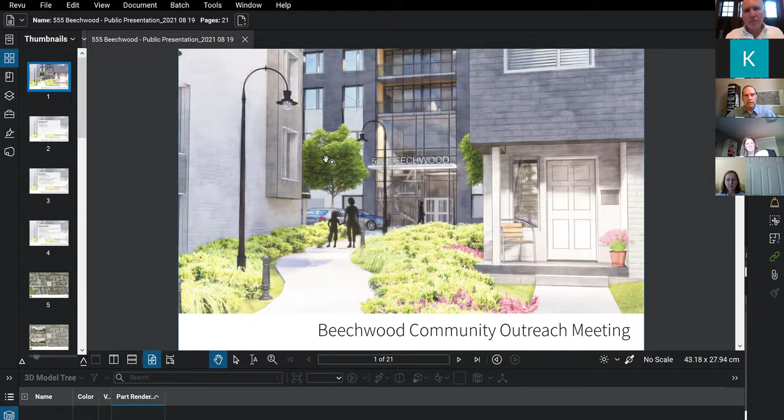This meeting's purpose, after the introductions, is to present the developer's preliminary design proposal for the development at 555 Beechwood, and to explain some of the reasoning behind the architect's designs for these lands. After the presentation, we will provide an opportunity for anyone joining us to comment on the designs or ask questions about what has been presented.

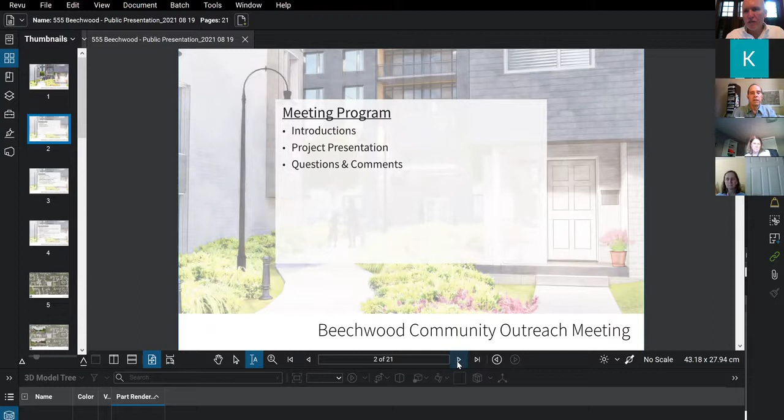Before we begin, I'd like to acknowledge that the Beechwood community, including the subject lands, are lands traditionally used by the Haudenosaunee, the Anishinaabe, and neutral people. We acknowledge the continuing presence, tradition, and philosophies of the indigenous peoples with whom we share these lands today.

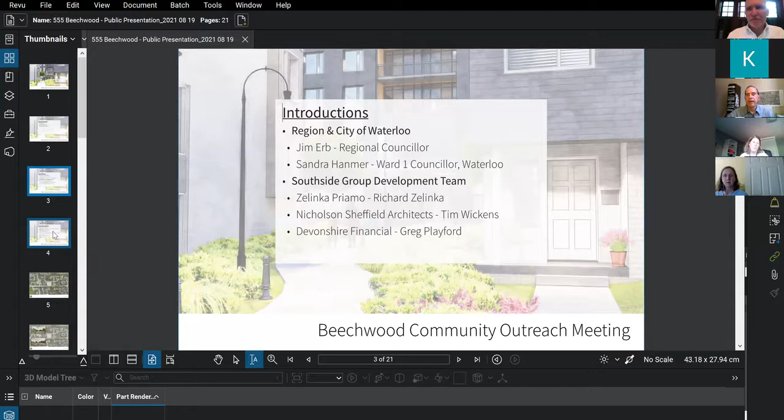I'd like to start by going over some basic project information for the design you're about to see at 555. That's going to be the name of the development for this area. I think it's important to recognize that this is primarily a market-driven housing development.

It is something that is going to be 60% geared to normal market rents in the community. So from that standpoint, it's a normal type of development that we would be reviewing with the city as part of a site plan approval. However, in this particular case, because of the region's involvement in providing the land for the project, there's an opportunity through this pilot program to provide 40% of the units within this development at a moderate rate. We refer to those as affordable units. They will be provided at 80% of the CMHC's median market rate, as that rate exists at the time of completion of the project.

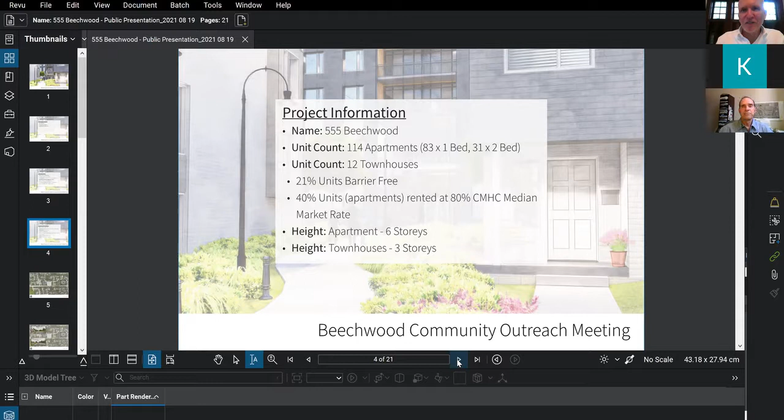So Tim, I'm going to turn it over to you right now, and we'll go through that presentation. Thank you, Richard. Again, my name is Tim Wickens, and I'm an architect with Nicholson Sheffield. We were excited to be invited to participate in this project with the Southside team. We're just going to walk through a brief presentation of the preliminary design proposal, starting with a quick review of the context, and then we look forward to receiving more comments and questions from people who are interested.

Some of you may be quite familiar with the context, but for those who aren't, it's important to note that aside from the sloping topography, which slopes down from Erb Street to Beechwood Drive, the site is significantly characterized by the fact that it fronts on two streets.

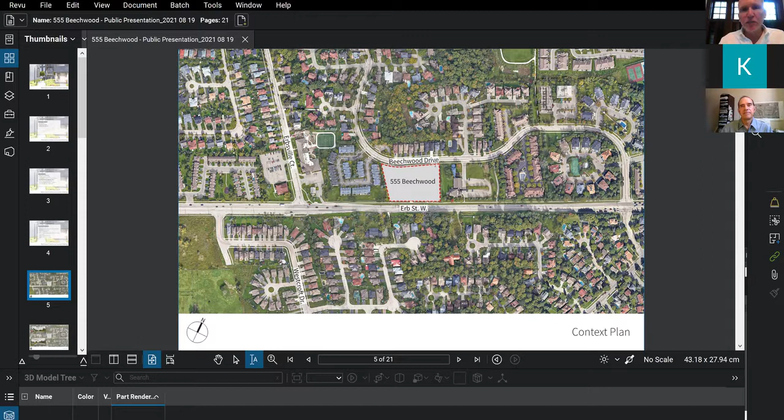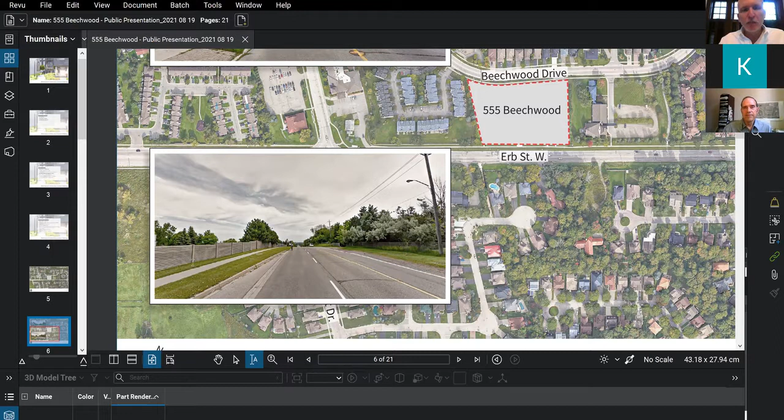If we look at the character of those two streets, they're quite different. Erb Street is a regional road with a higher speed limit, higher traffic volumes, and higher traffic noise, but it doesn't have many buildings that address the street directly, with most properties either side lotting or rear lotting onto it. The street is generally framed by sound barriers, fences, and privacy planting.

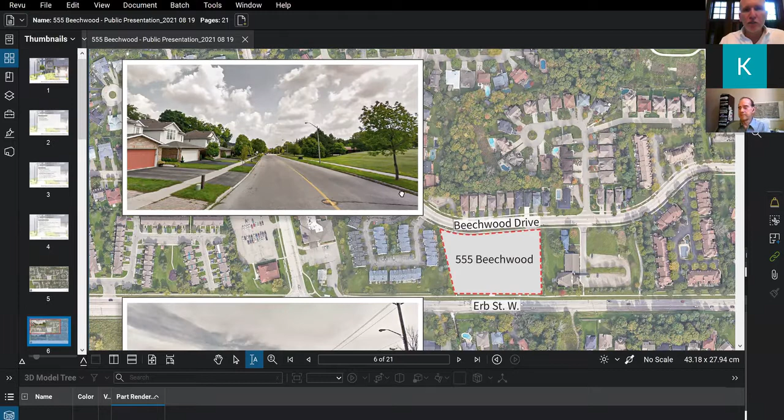Then if we look at Beechwood, especially right at the site but even in the plan, you can see this is a more traditional form of urbanism that is more pedestrian friendly, with a lower speed limit and lower traffic volumes, with not a lot of through traffic like on Erb Street. It's also predominantly characterized by buildings that address themselves directly to the street, of a certain residential scale and rhythm. That's important to how we design to respond to that.

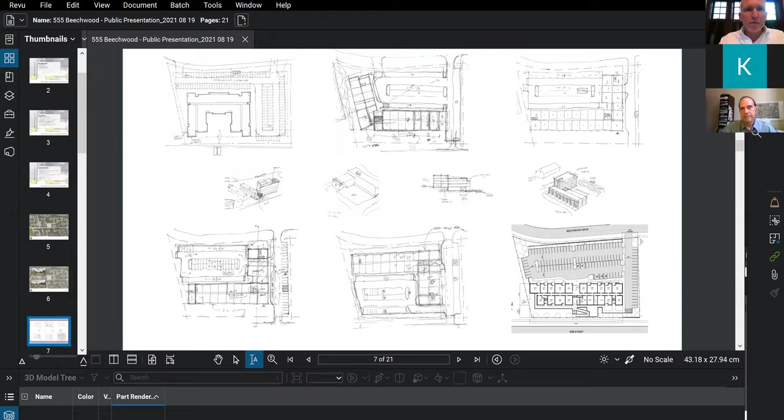The consistent thing all of these attempt to do is locate the massing in a way that contributes to that positive urban environment, predominantly locating a larger building on Erb Street that, as you can see in this rendering, transitions down to a smaller building on Beechwood.

As we worked our way through these things, we had to test them to a greater degree of specificity in the computer, inputting this information in hard lines. Initially we found that we could achieve the desirable outcome in terms of providing affordable housing and residential suites in a single building on Erb Street. We figured out a location for the driveway that made sense from a traffic safety perspective, located midway between the two bends in Beechwood Drive.

But what we found, especially after consulting with the region and city and reviewing in more detail the urban design guidelines for Waterloo and the Beechwood community design guidelines, and also reviewing with the region the comments they received from the community, is that we were going to have issues with the exposure of the parking to the friendly established residential community currently found along Beechwood Drive.

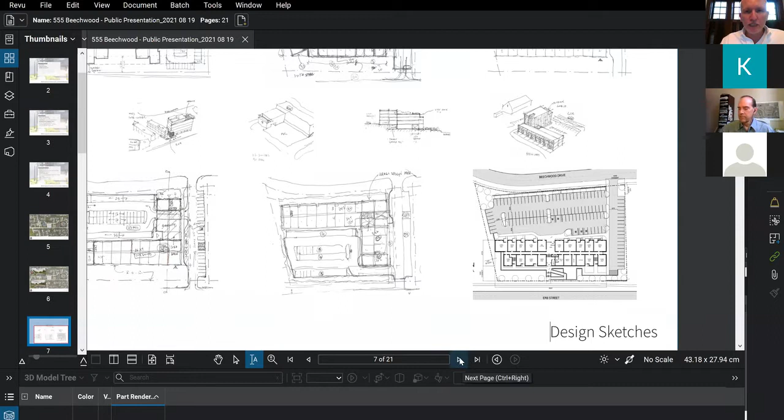So we decided to revisit the scheme. If we go to the next slide, you see what's been done: the mass of the building on Erb Street was reduced, and the parking that was initially surface parking was tucked under the building in a subgrade parking structure. So essentially about a third of the parking initially proposed for the surface is now under the building.

That gave us room to create these townhouse buildings, providing another form of housing of a different scale and type, and a transition from the Beechwood community of single-family homes and low-rise multi-unit residential development up to Erb Street and the larger building we've located there.

We've also located, as an amenity for the development and the community, a mid-block connection for pedestrians that would lead to Erb Street, quite close to the bus stop at Erbsville Court, complementing the existing through-block connection on the Cedars property.

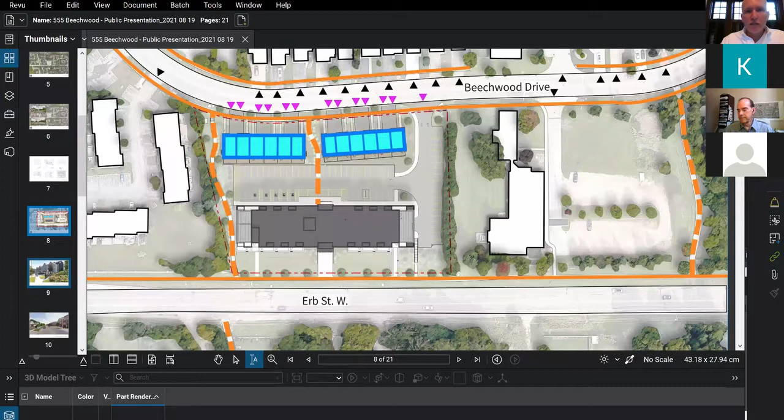And here we have a view of the west end of the development at that mid-block pedestrian connection. This is a preliminary design proposal, so the details haven't all been worked out, and part of that is why we're here tonight.

It's to get some feedback on some of these details and ideas that we're presenting. But the intent expressed here is that we would be providing a landscaped and formalized walkway, so that the site would be traversable, and the two streets would be connected year round, and that it would include site lighting, so that it would be safe day or night for anybody who might be taking transit and coming back into the community in the evening.

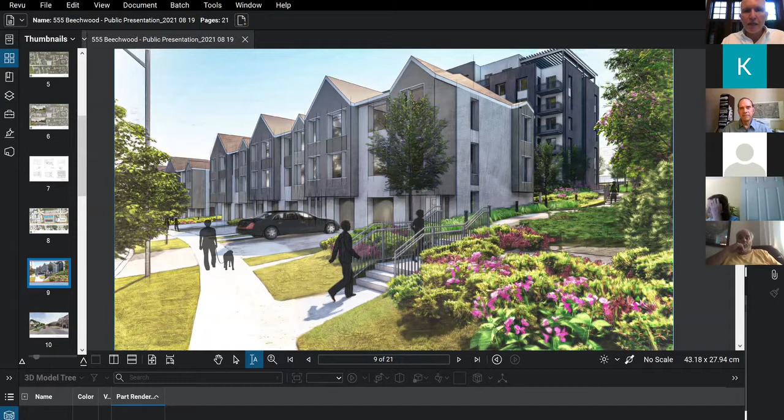This image also describes to some degree the role of the townhouses in mediating the lower rise community on Beechwood with the building that's proposed for Erb Street.

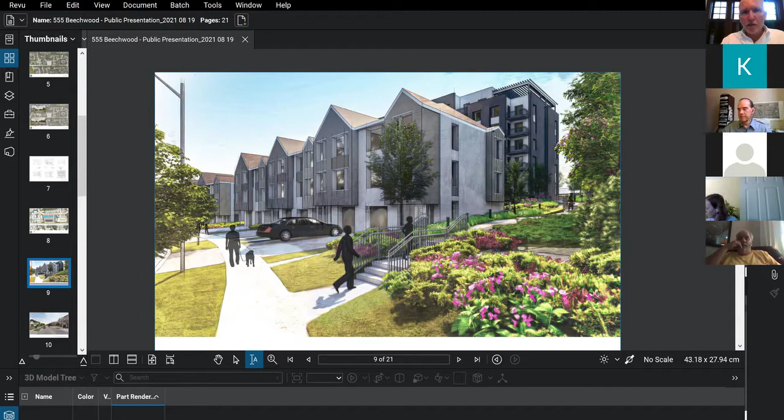So a view directly down Beechwood to the east, with the existing homes on the left side of the screen, and the proposed townhomes on the right side. Again, as a preliminary design proposal, we are working out some of the details, but the idea is to take inspiration from the architectural forms of the existing homes, and the scale and rhythm of those homes as they present themselves down the street, to create a very specific experience for a pedestrian, and utilize those to create these townhomes.

Some of the features that I think are important to these are the idea of the recessed porches that manage that transition from the public space of the street to the private space of the homes, the gable roof forms of varying scales or sizes, and the use of high quality building materials that would be found in any established residential community.

Certainly in this one, like the brick masonry that's proposed for the base of the buildings, with contrasting brick masonry for some of the details, and in this case, we're proposing a wood patterned siding for accent materials.

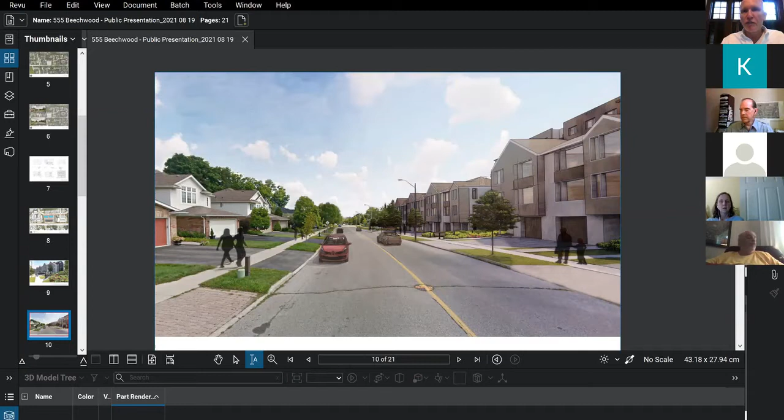And again, you see that the townhouses are providing that screening for the surface parking that exists between the townhouses and the building on Herb.

And then this is a view looking the other way towards the west from the driveway entrance to the site. It is notable that the distance provided between the driveway and the bend in Beechwood at the west end, where it bends to the north, provides a long sight line, and it's intended to provide as safe a traffic condition as possible.

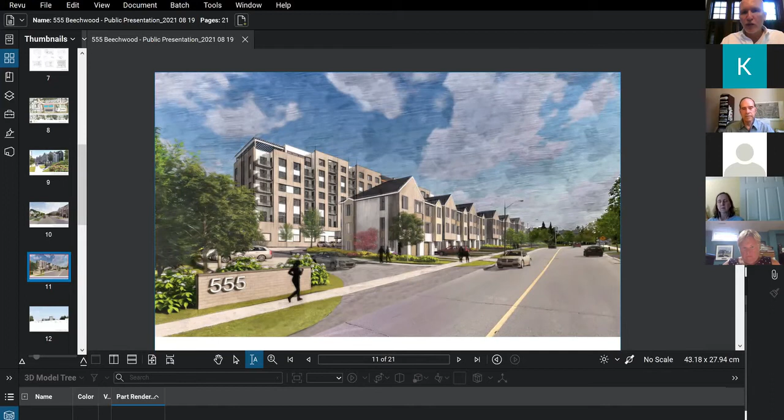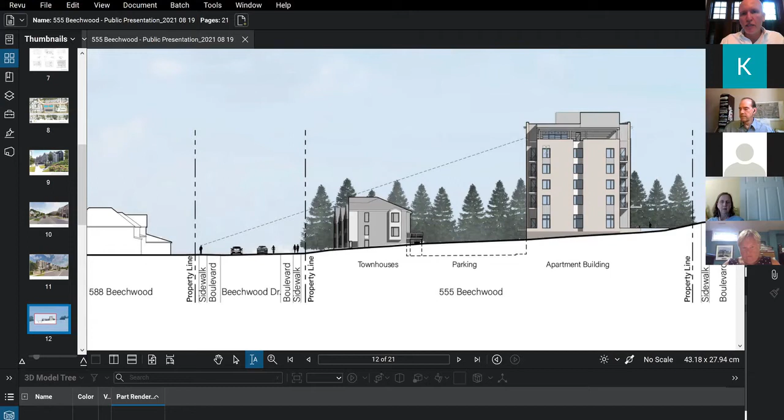And also it creates a visual transition from Beechwood, where the building on Erb, the apartment building, is seen as a background and in the same view line as the townhomes themselves.

And then the building on Erb is designed to be in scale with the street itself and to frame that street and address itself to the street.

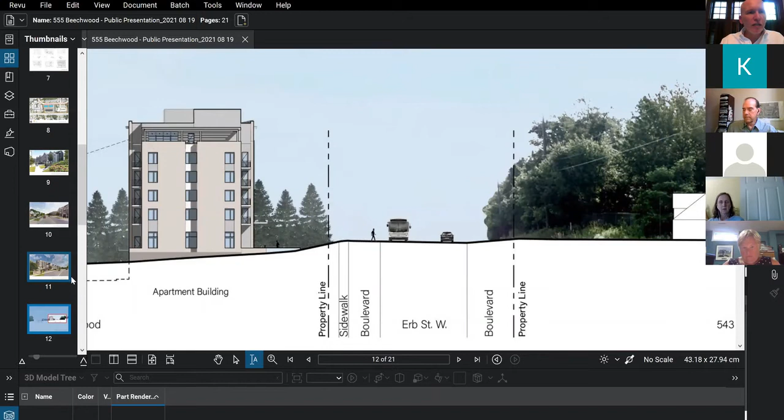If we go to the site plan, again, the intent there was that this building was reduced in scale from the original proposal after we reviewed comments from the community and from the region and the city urban design department and planning department to make room for those townhouses

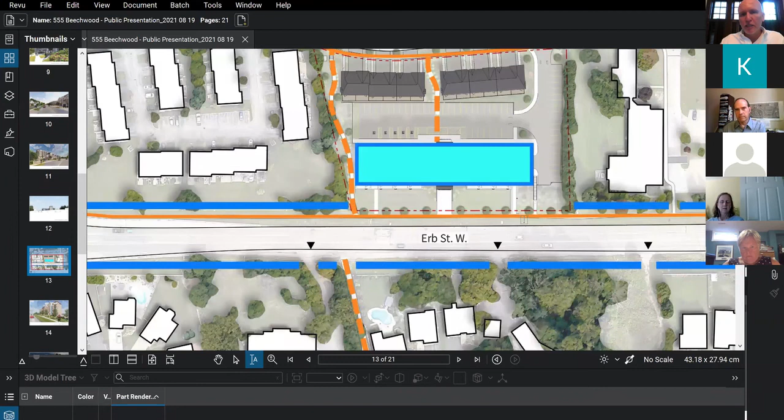and create an address on Erb Street, where typically at this time the existing buildings on Erb are facing the opposite direction or are side lotted or back lotted, creating a kind of a closed corridor for Erb Street. And the intent is that the proposed building would address Erb

and provide some of the overlook and sense of inhabitation on the street that's important for a safe pedestrian environment and certainly a safe route to get to public transit at the west end of the site. So this is a view from Erb looking at the building, the apartment building, and we're looking towards the northwest, mostly west.

Still working through some of the details on the building, but we've landed on a strategy where the building is broken up with vertical reveals to break down the massing of the building and provide visual interest at the ends of the building at the east and west.

As Richard mentioned at the beginning of the presentation, the building steps down and steps back at the 5th floor to create another vertical transition for the building to the adjacent properties. It also provides a large outdoor amenity space at the top of the building facing east.

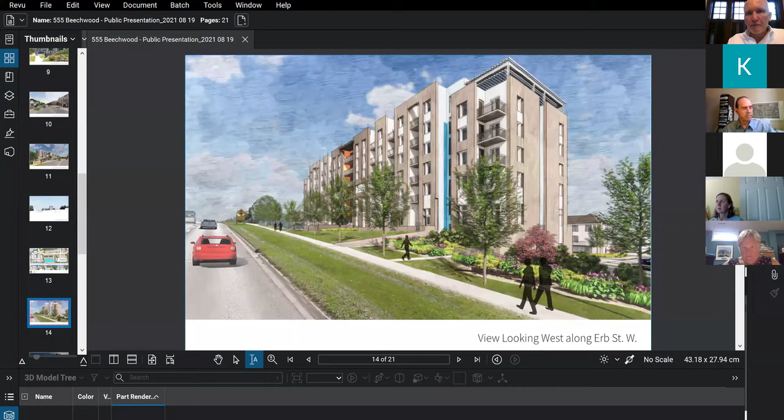This view also describes, at the smaller scale, that at grade there would be walkouts from individual units. And at the larger scale, the building creates that address on Erb Street, so it has a direct connection to the public sidewalk, through the use of landscaping and garden walls.

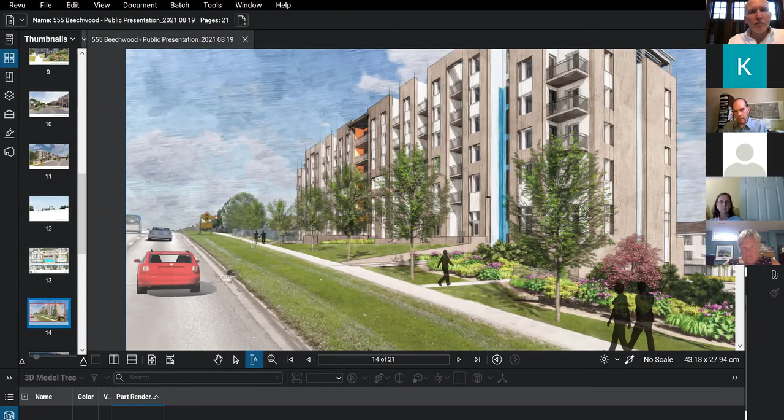Canopies, and this large vertical reveal in the building facade, and then an urban scale canopy, creates a clear address on Erb Street and a relationship to that public realm.

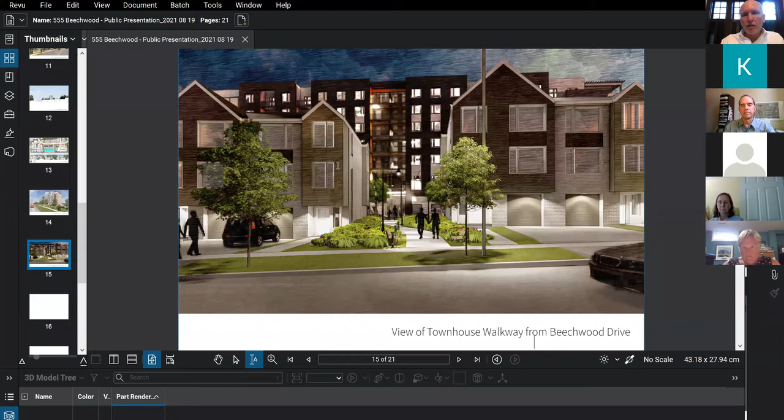And then finally, this is an image from Beechwood looking towards the building on Erb. And I mentioned this earlier, the separation in the two sets of six townhouses is a landscaped pathway that's meant to certainly break up the mass of the townhouses into something more akin to the scale of buildings that already exist in the community.

But it's also meant to create an appropriately scaled address for the building and a way for that building to relate itself to, and for the residents to participate in, the community and the culture of Beechwood.

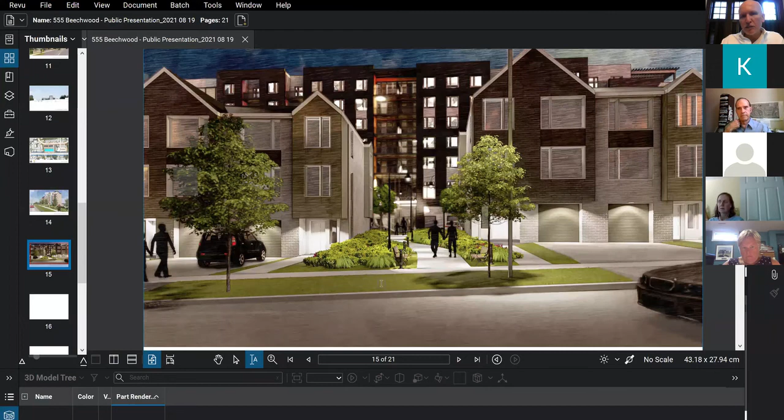And as the through block connection was described, it's meant to be lit and a safe place for people to navigate back and forth between the community and that building.

And with that, I'll send it back to Richard to, I guess, open things up for comments and questions. Thank you.

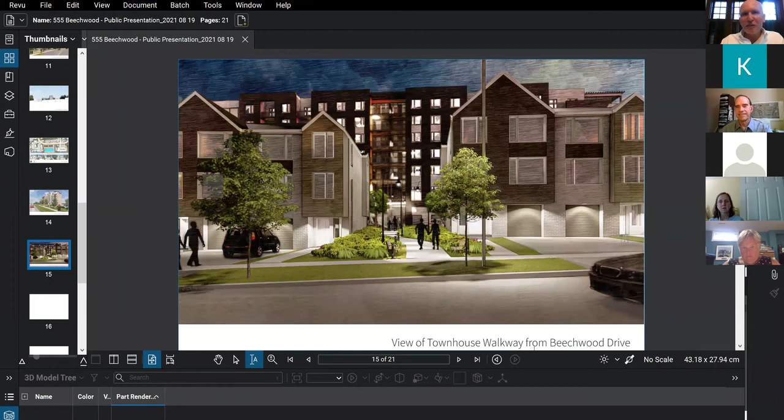Thank you, Tim. So the developer's design team has attempted to meet both the need to fulfill the housing objectives of the region and the city, and has to address some of the comments and issues already raised from community members, also from the city and the region.

You've seen from Tim's presentation the inclusion of townhousing to provide transition and the screening of the parking areas and screening of the apartment building, the view of the apartment building. You've seen the attempt to address both streets in different ways because they are different streets, Herb and Beechwood.

Tim has described some of the high quality design and construction materials intended to be used in this development. So overall, we believe this is a very exciting and desirable type of design, one that would be fitting for its place within the community between Herb and Beechwood.

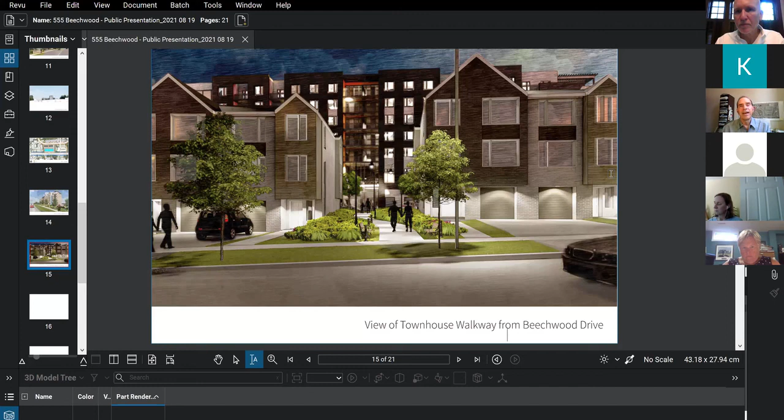And I should say as well, the submission to the city itself will be subject to further consideration and examination by city staff to ensure all the city's guidelines are being met properly, and there may be certain additional changes. We've already had input from both the city and the region to help the design at this stage. So we're looking forward to your comments to help us get to the next stage of the process.